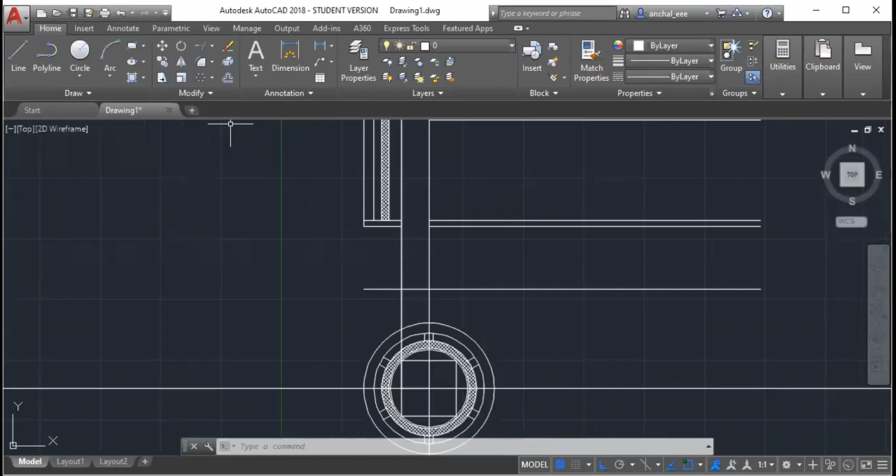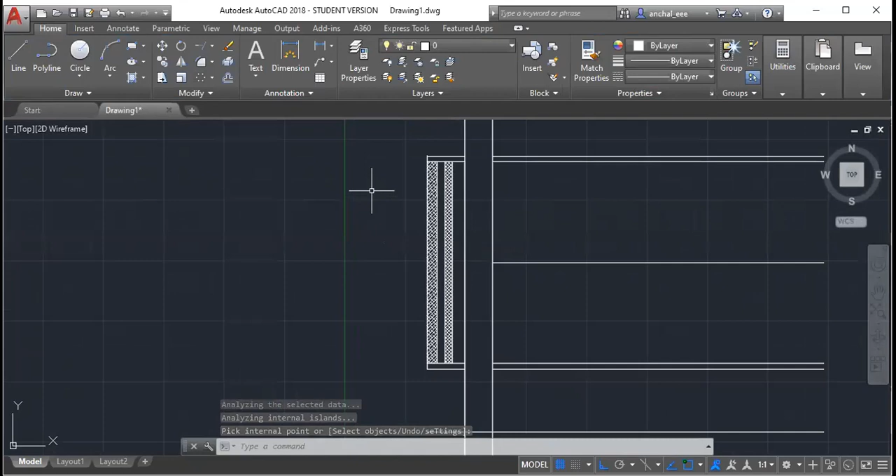Anyways, we are repeating the same thing only. We will hatch now HV winding also. I'm taking the next one. So HV winding also we will hatch it. Okay, now I will hatch the insulation also. Insulation with solid. This one, and wooden pieces.

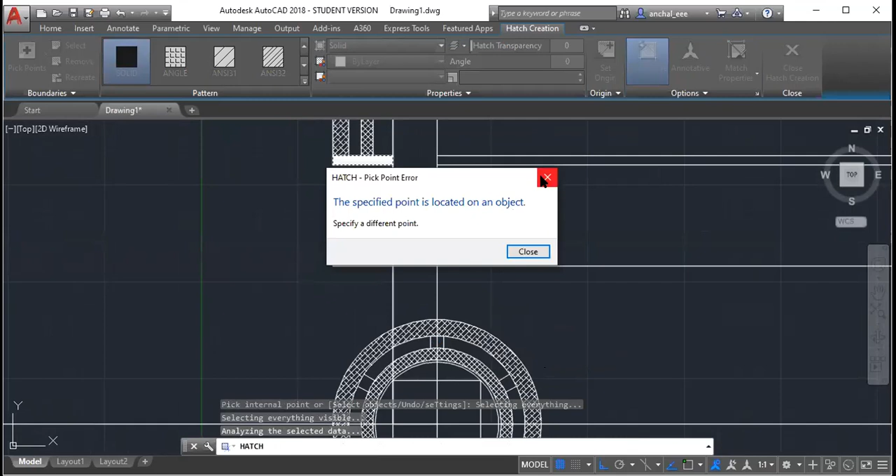Wooden pieces. For that wooden piece also, no. I think this is not. If this is not extended, then others will also not be extended. With respect to this circle right here. With respect to this circle and this.

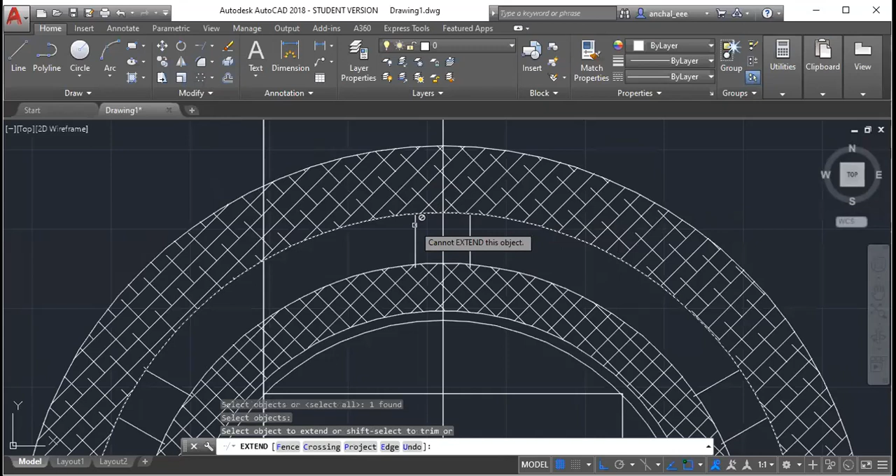I'm deleting this wooden part. I will draw it again because it's not letting me hatch it. I don't know. I will do this mistake.

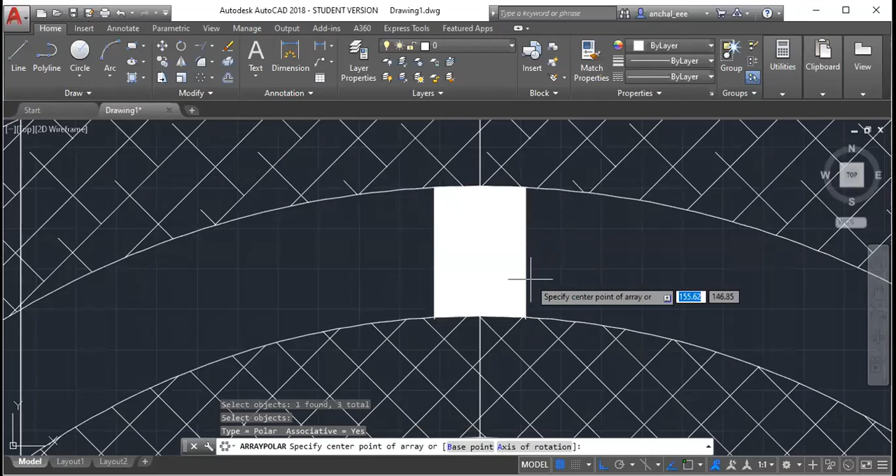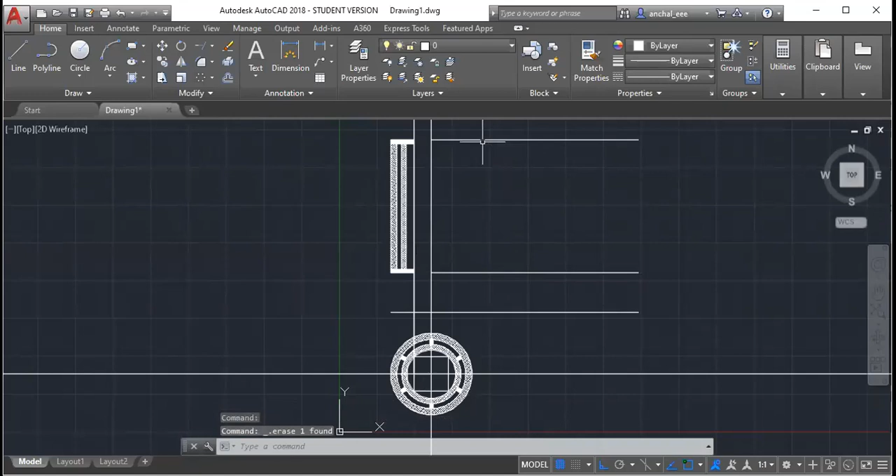So have you finished till here? Have you all finished till here? Please, you have to reply to me, otherwise I cannot keep talking on my own. Yes. Have you finished till here? People are not replying, so I will keep doing my work.

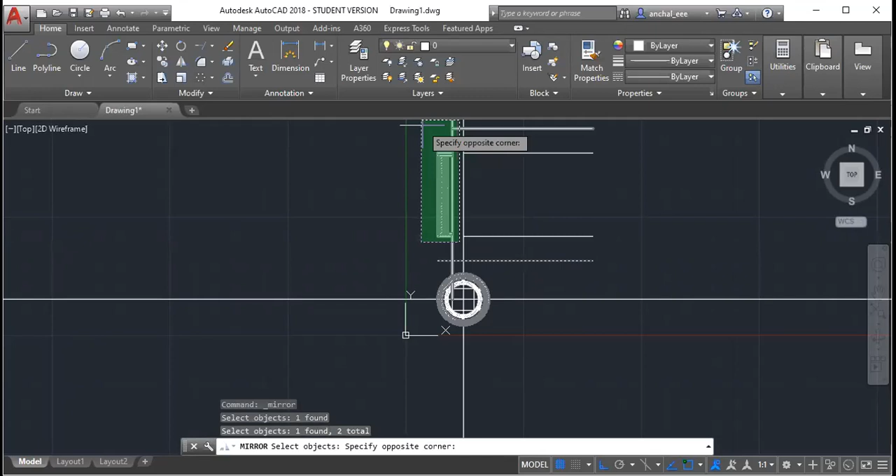So mirror. Now we will mirror it. How will we mirror it? What all do we have to mirror? We have to mirror this core, windings. Okay, and this is my mirror line from here to here. Length. So I will get a complete core here.

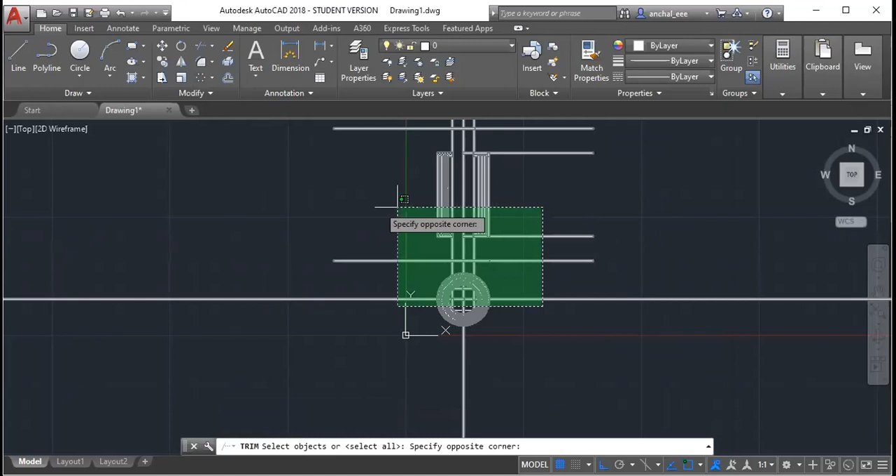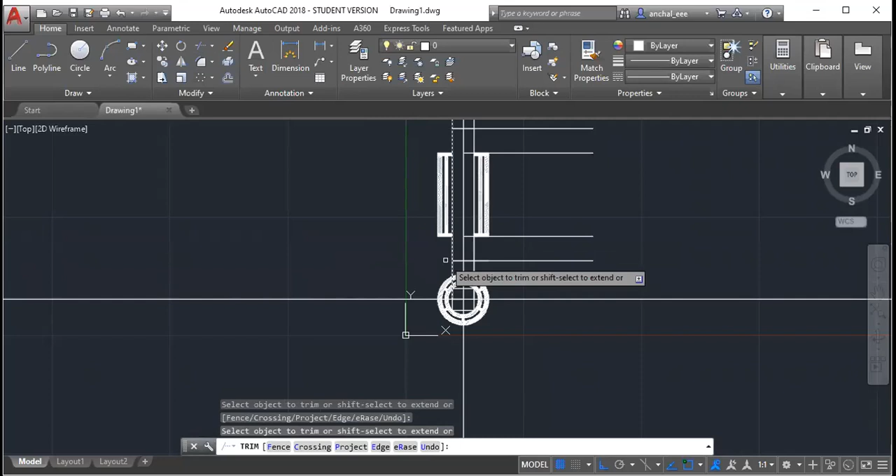Now again, now you can make the proper core. So what will you do now? You can trim it. Trim. It will take a little time for you to understand what all is required and what all is not required. Now, if you see, so we don't need this line also, and in between I don't need this line also, this line also, this line also, and okay, I will keep it. I will just delete this one. This one. Remove this. And this. Okay. Now you have drawn till here.

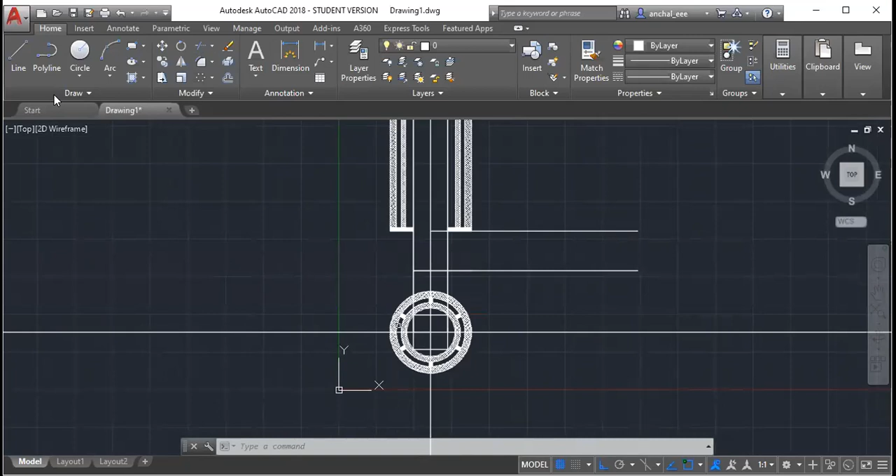Now what we are going to do is, you can see the distance between the two cores, or the two limbs, is 160 mm. So I will use copy now. For copy, select all the objects, okay, till here. I right click. Base point will be my center of the first core. From here, I have to displace it, I have to go 160.

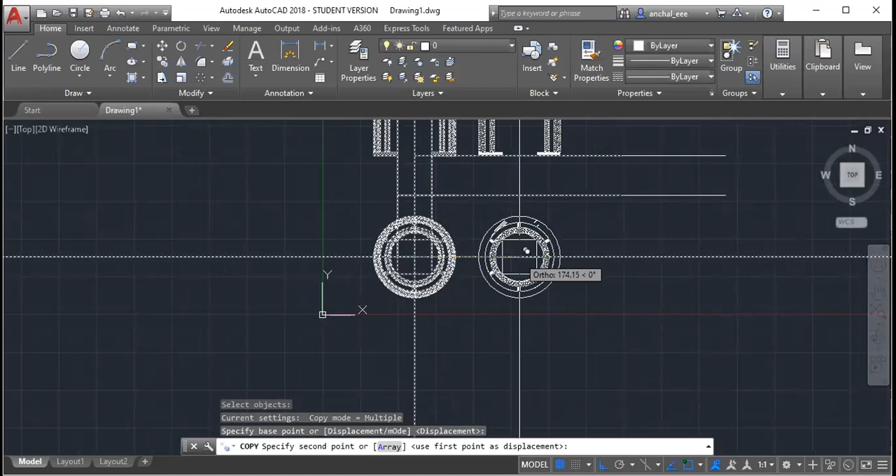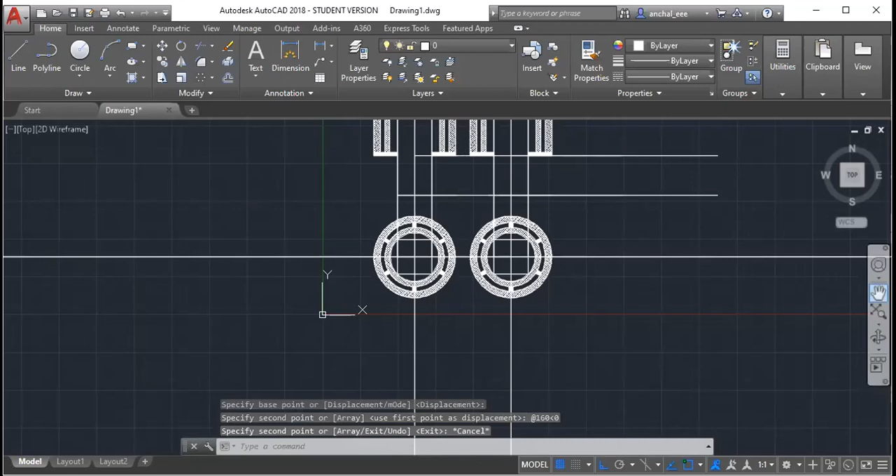See, if I am moving my cursor, then you can see it is showing 160, 1.02 like that. It is difficult for me to make it exactly 160. So I will write here @160, angle of 0 degrees, enter. So you will get the core. Are you getting it?

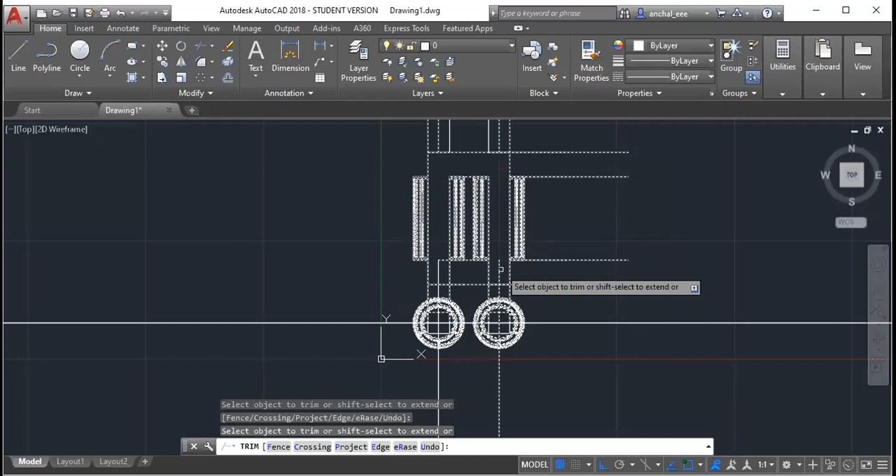Then now I will trim my transformer. My drawing is complete. I will trim it. Whatever is required, I will keep it. Rest all I will delete. So I don't need this now. Just make a core first so that you are not confused. Okay. Now I don't need this line. This line. Okay, this can be deleted. This line. Then this line. This line.

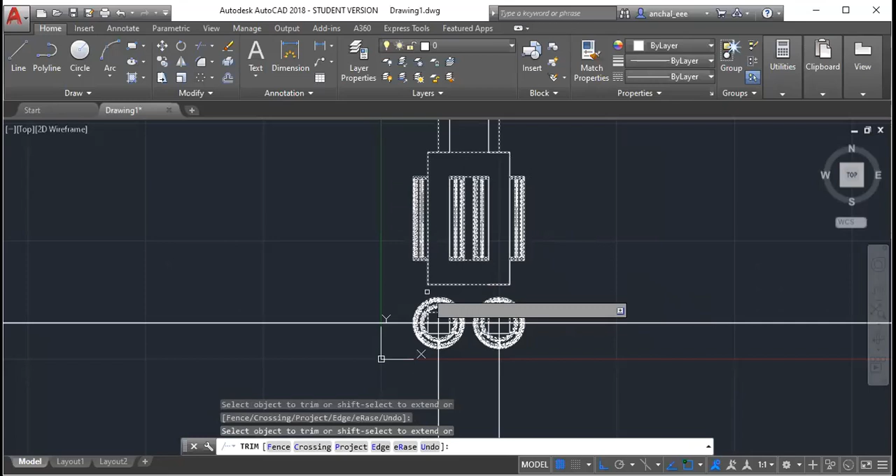Why has it come double? Because we have done the mirroring, so that line has become double. That is okay, not a problem. Whatever you can trim, you can trim. Now escape, select the extra lines to delete. I don't need the construction lines now also, I'll delete.

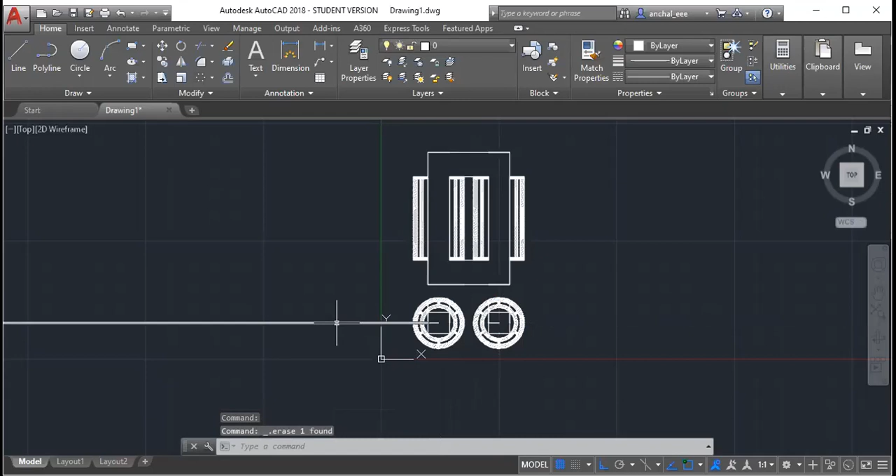One more thing, sorry, I forgot to hatch the core. So we will hatch the core now with standard hatching. This one, let us see whether it comes. See, it is coming diagonal, but when you cut the core from the top and you see, it should be with horizontal lines. So we will have to change the angle. I think 135 will work for it.

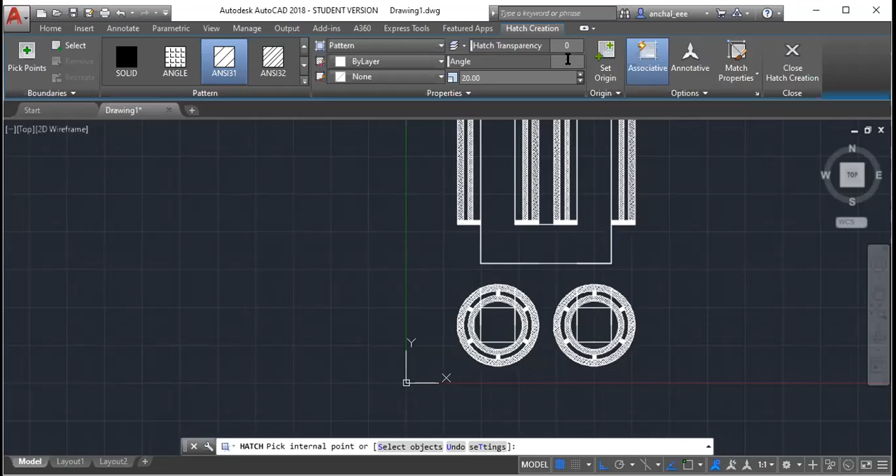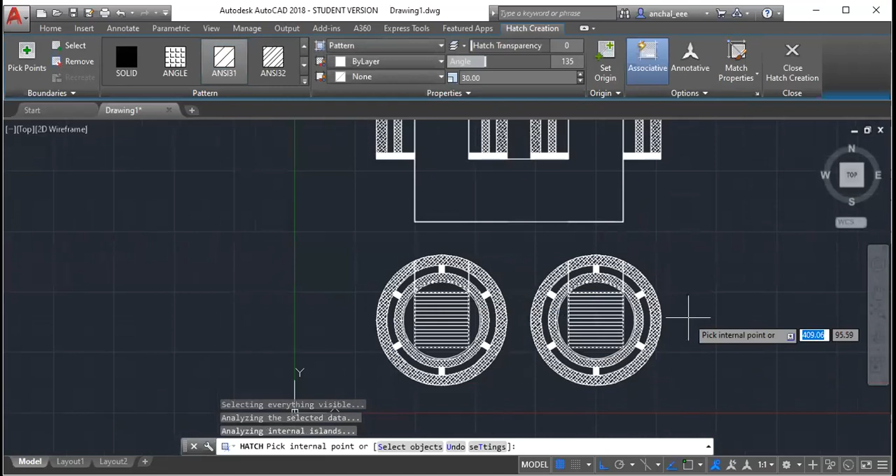Yeah. So you can see this scaling is too much. So we will increase the scaling also. I'll make it 30 and see. Okay. Let it be 30. It has gone up also, no? Because we have not deleted this one.

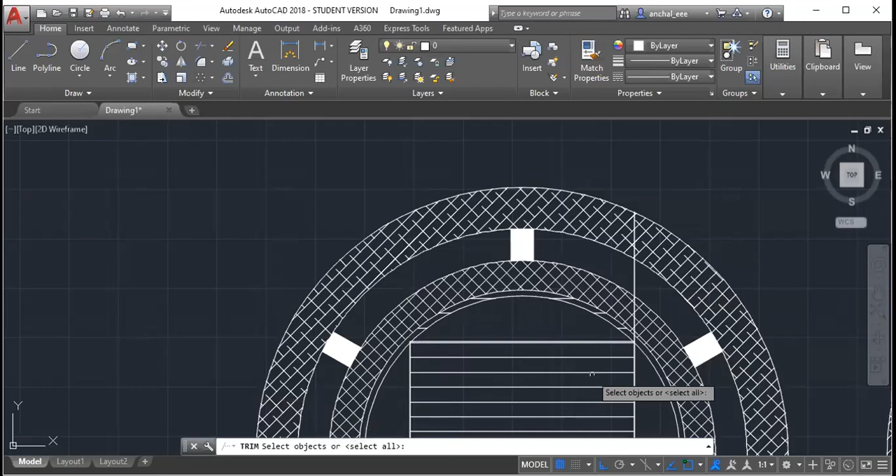So we will do trimming with respect to this line, we will remove this line, and as well, okay, trim with respect to the upper line, remove this line. Is anybody having a doubt here? We are almost done with it. Yes, please. It will be good if you tell me now.

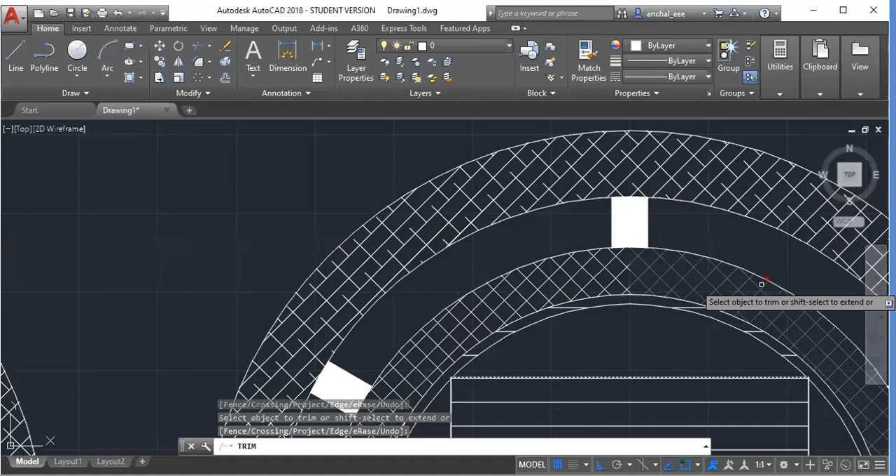Yes, we are left with a very small part, and you will be able to see the core here also when you are cutting it, right? So what will you do now? You will extend it from here to here. When you cut the core from the top and see the upper part of it, you will be able to see from here to here also. We extend from here, this is this one, from here to.

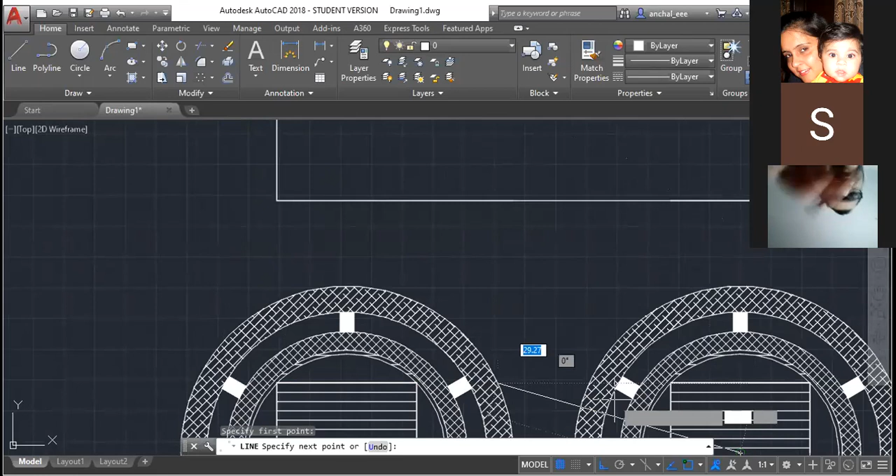Yes, Dawood. Yes, Dawood. Yes, ma'am. Why have you turned on your video? By mistake. Okay, I thought you had some doubt. My laptop now keeps hanging in between.

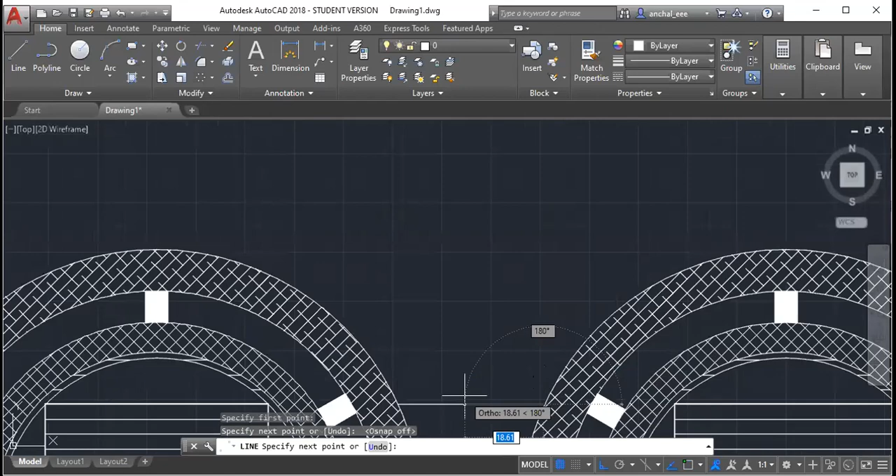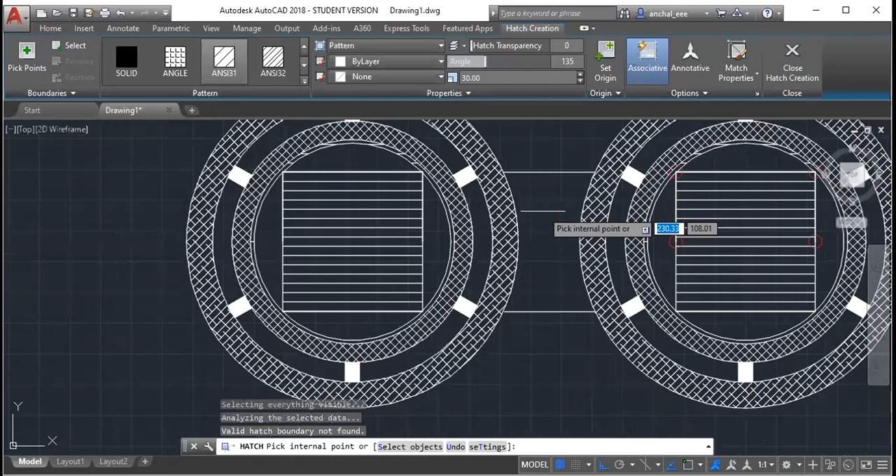Okay, so you have to draw the core here also. I draw on this object here and I am taking the point from here to here. You have to be very careful while drawing it. Okay, now do the hatching inside also. Not a closed boundary. It is closed. With respect to this. Why I have extended here. Yeah, please try it. Okay. After doing this, you hatch it. That's it.

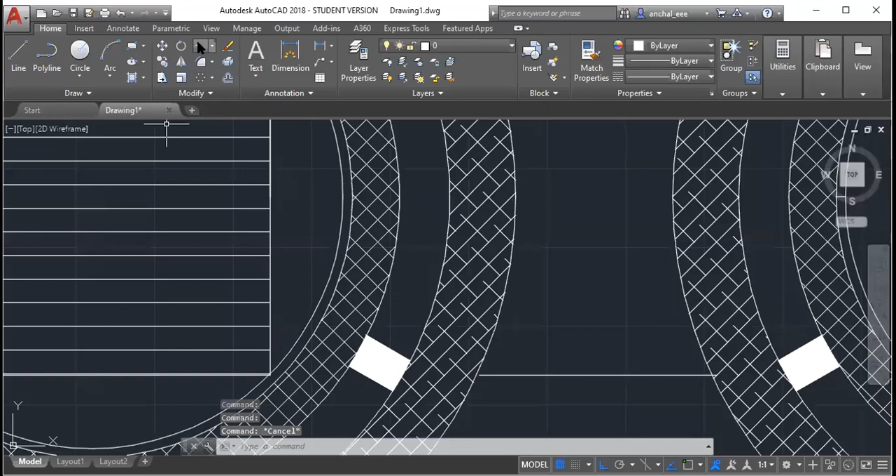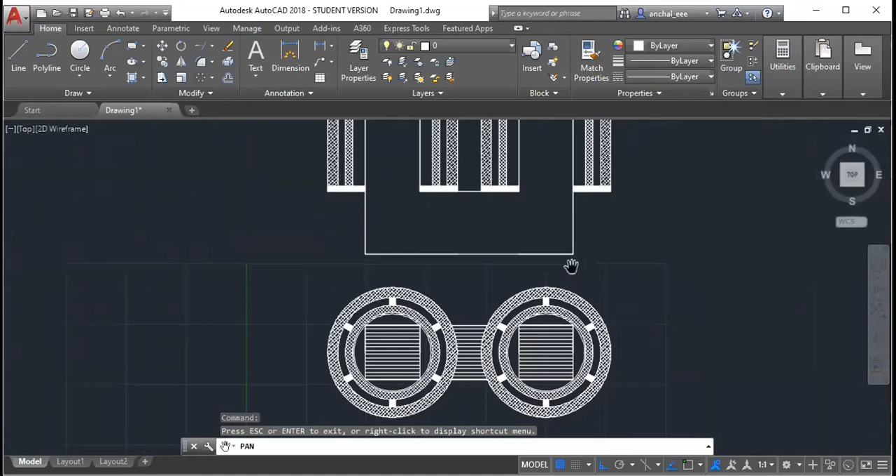Nothing much is left here. So it is done. Is it clear? Please say yes or no. Yes, ma'am. Yeah, now you have to draw the side view also. So how will you draw the side view? Side view is what will be visible when you see the transformer from this side, from here to here, looking from your right hand side.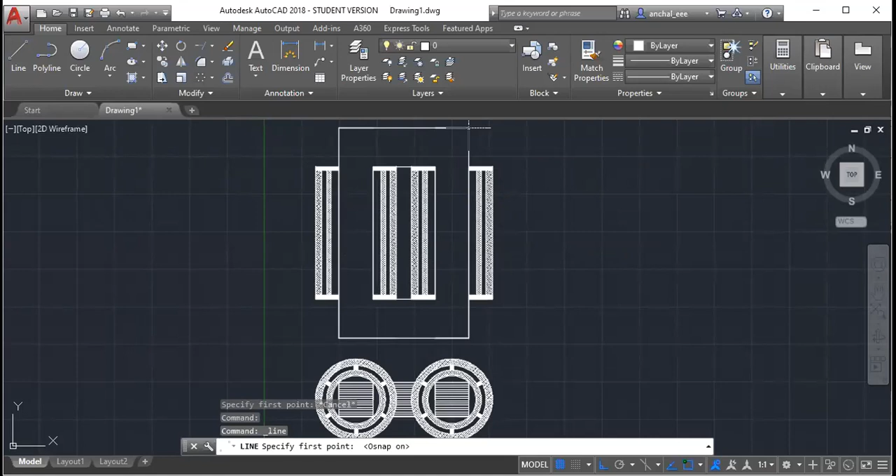You will see the core upside and downside, and that core is bound with the winding. And which winding will be visible? HV winding. Right. So what we will do? We will draw one line. We will just extend it so that we can get the height of it. Okay. And from here also. Okay. And then I am drawing one vertical line also from here to here.

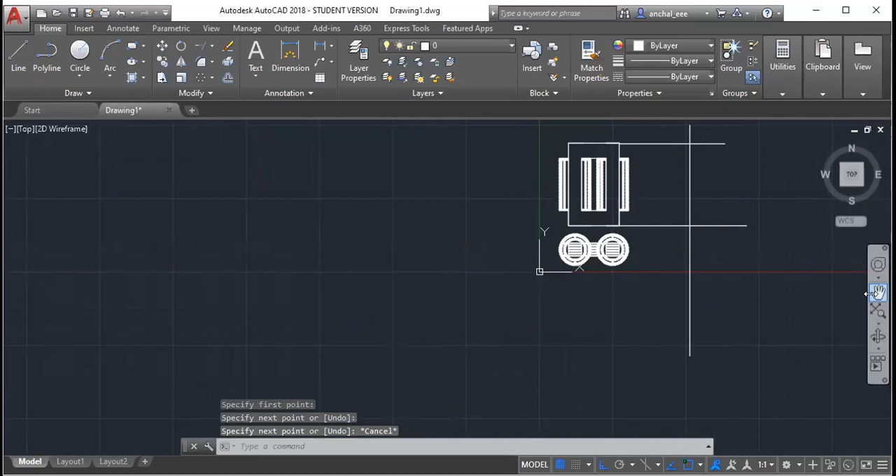Now exit it. Now you know that the width of the core actually is not given to you, but we have taken it as 56.8, that is 28.4. So I will take the offset of 28.4 only, and I will draw it here to here. Fine. Then winding width is not given to us. So approximately I will take something. Suppose I will take it as some 100, enter. From this center line, go this side 100, go this side 100.

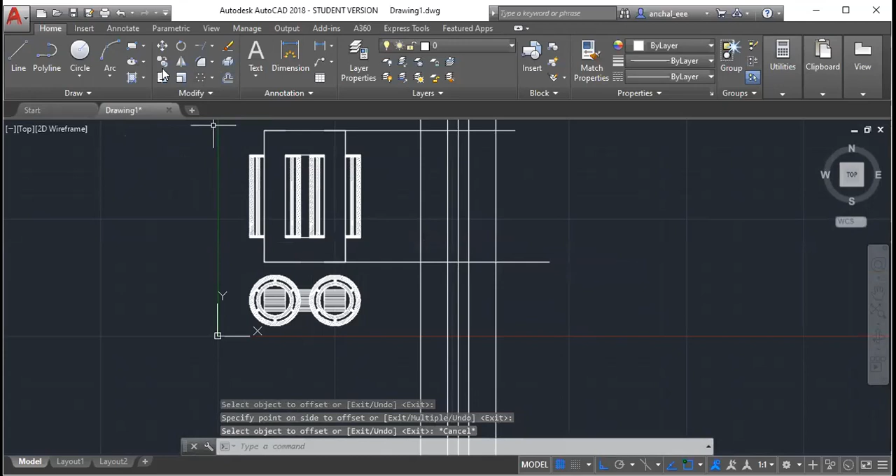Okay, and now see the insulation is here, winding is here. So from winding, I will draw a line. Again, from winding, I'll draw a line.

Now again we will do, who is talking? Please, if you are talking with your family members, keep yourself on mute. Yes, please. If you are talking to your family members, keep yourself on mute.

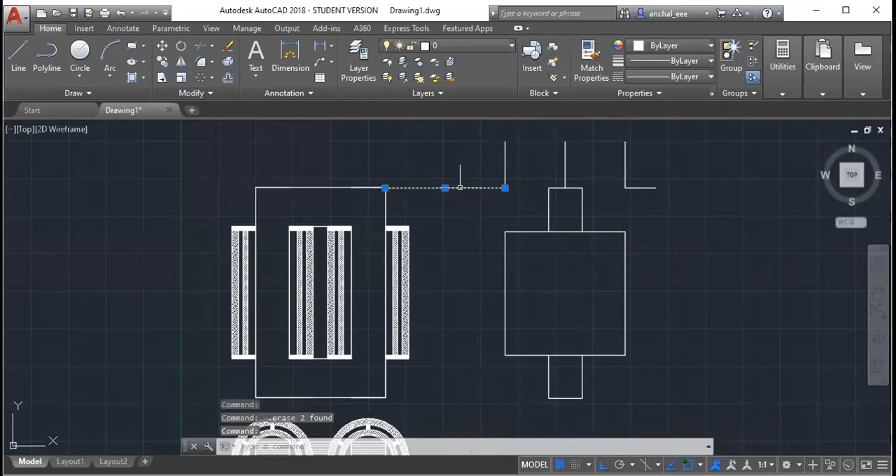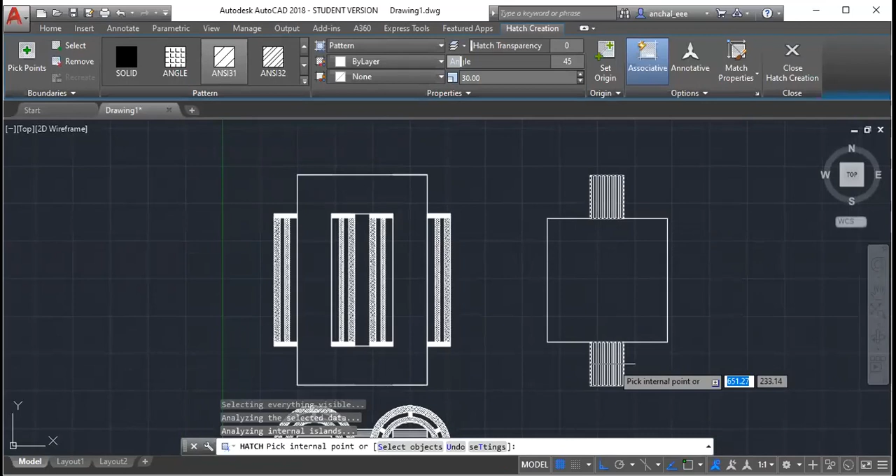So this is the side view of your core of the transformer. Now the core we have hatched with normal hatching. So 135 we took for horizontal lines. For vertical lines, I think 45 will work. Let us see. Yeah. So from the side, the core will be visible like this. Alright. And outside, I will be able to see only the HV winding, because it is wrapped with HV winding. I think I have used this one for HV winding. I will put that. That's it.

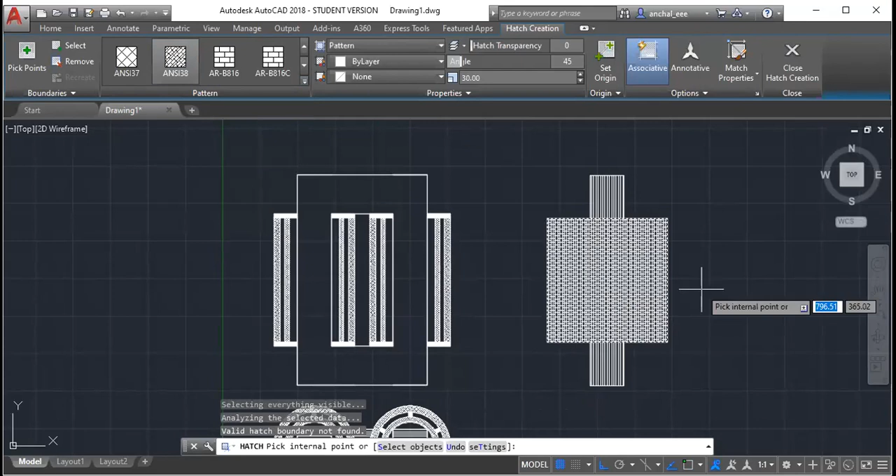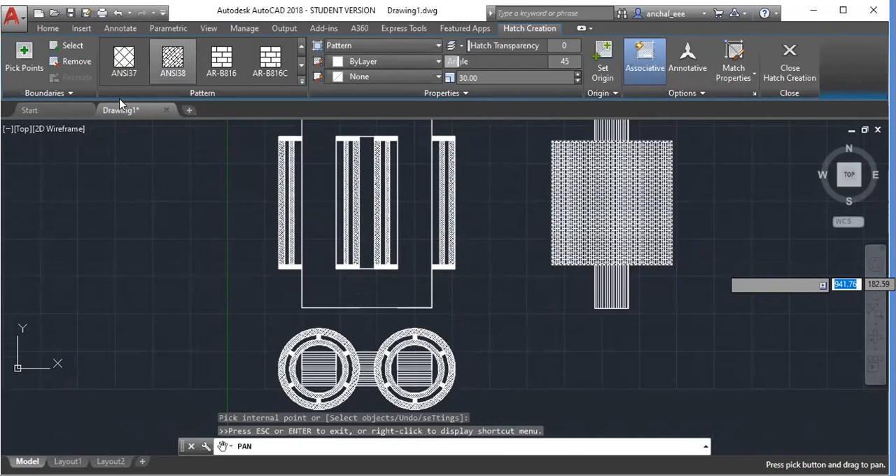Anybody having any doubt here? The width of the winding is not given to you, so you can take anything. So this is the end of your question number 2. We have drawn everything. I hope you all know how to give the dimensions. Please tell me, otherwise I will tell. Yes. Please tell whether you know how to give the dimensions or not. No, ma'am. Can you please tell?

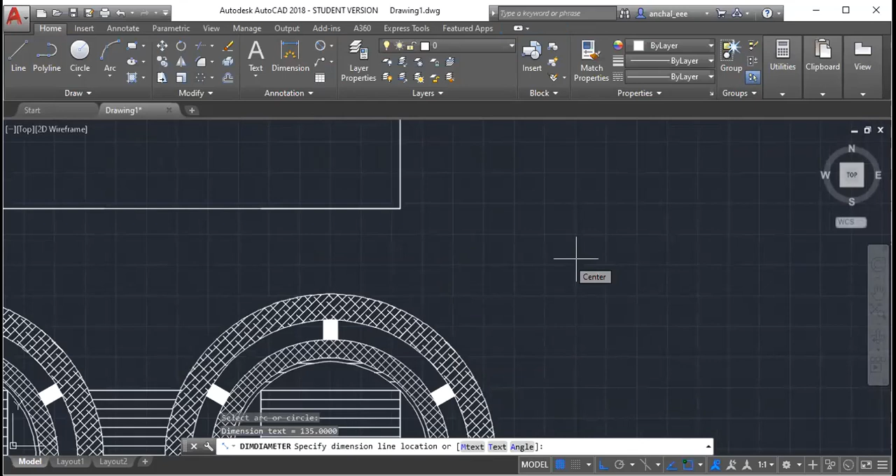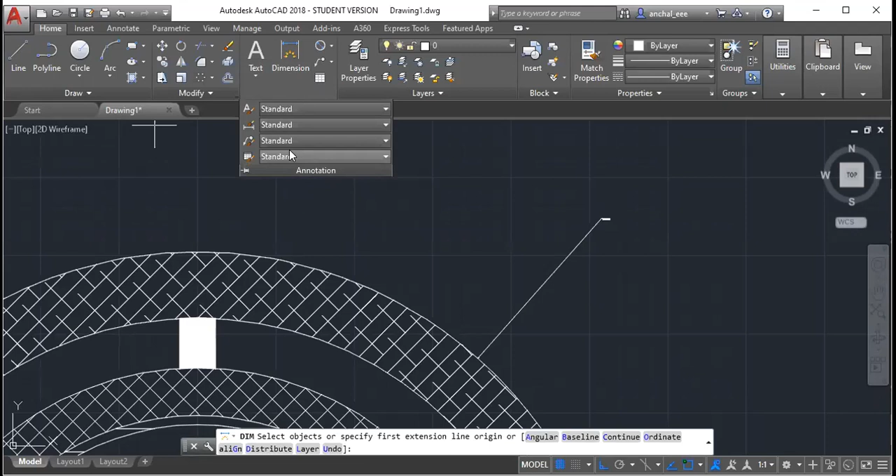Go to the dimension. So firstly, we will give the radius and diameter of the circle. So from here, I have selected the diameter. Now click on the circle and pull it out. Pull it out. Okay. But you can see you are not able to see the dimension. So what will we do? How to go to modify? Yeah. Inspect. Here, one minute.

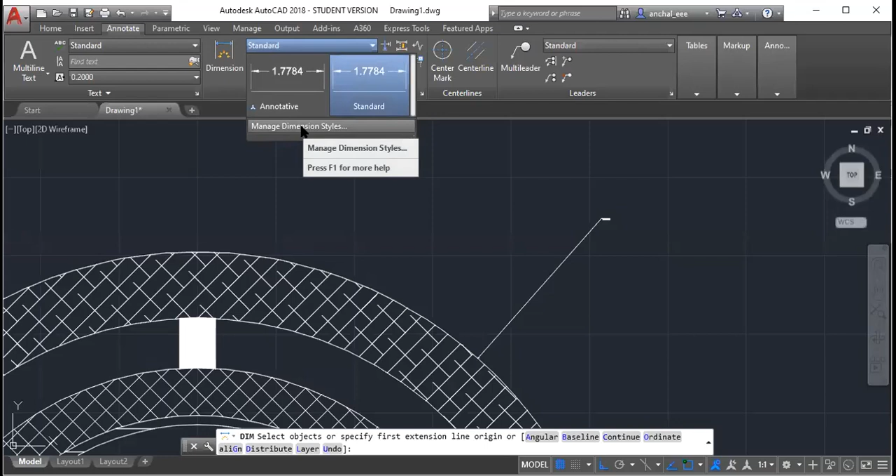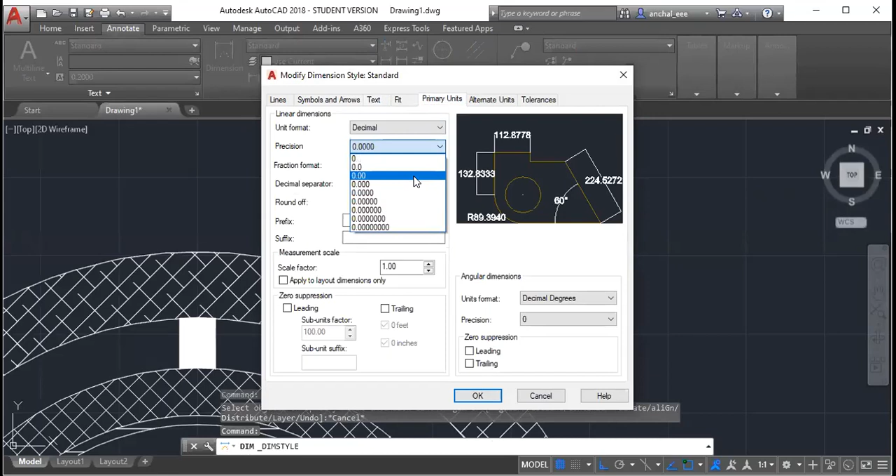Go to standard, then manage dimension style, then modify. In modify, go to text and increase the text height. Suppose I make it 10... let's try 20 and see what it looks like. Then go to primary units and set the precision to 2 decimal places. That's enough. Symbols and arrows are also there, give 20. Say okay, close.

Can you see? We are getting it. Yes or no, ma'am? Now I think this 20 is too much.

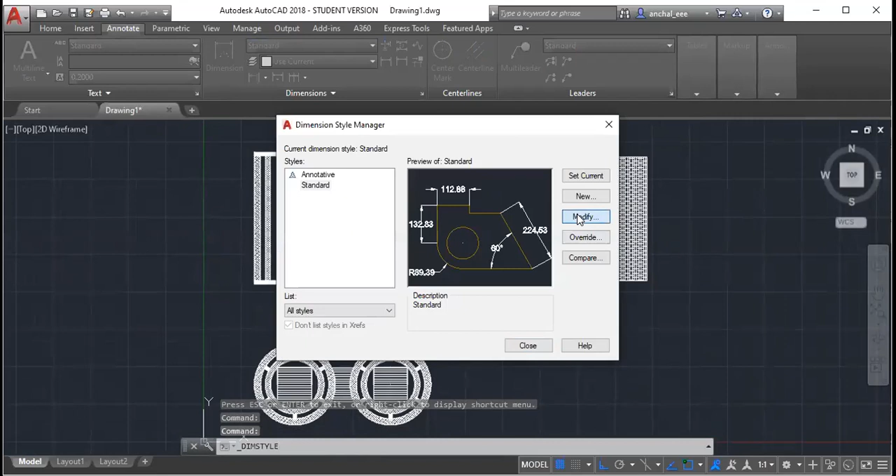So again I'll go to modify, go into text, and make it 10 only. Symbol and arrow also I will make 10. Say okay, close. So it's fine. According to the diagram also, it's looking nice. Anybody having doubt in this?

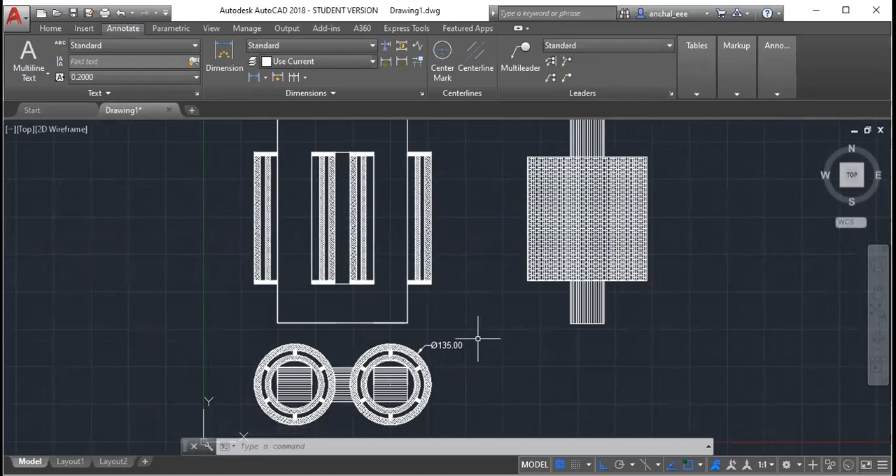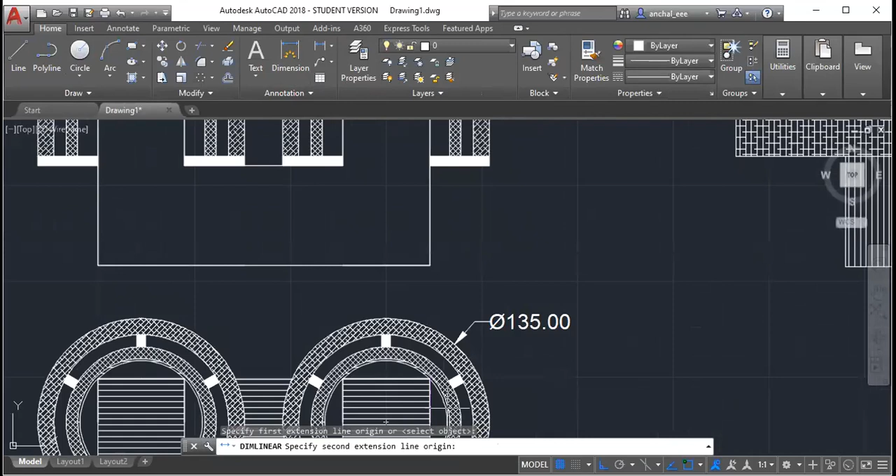So we will see the core. Go to home, then dimension, and select linear dimension. From here, linear dimension we select and go from this corner to this corner and pull it. So it is 56.8, that is what we have there. Correct?

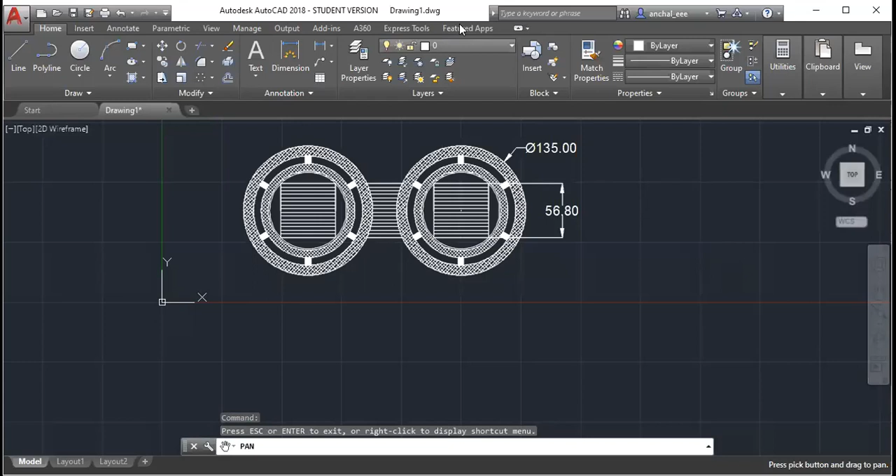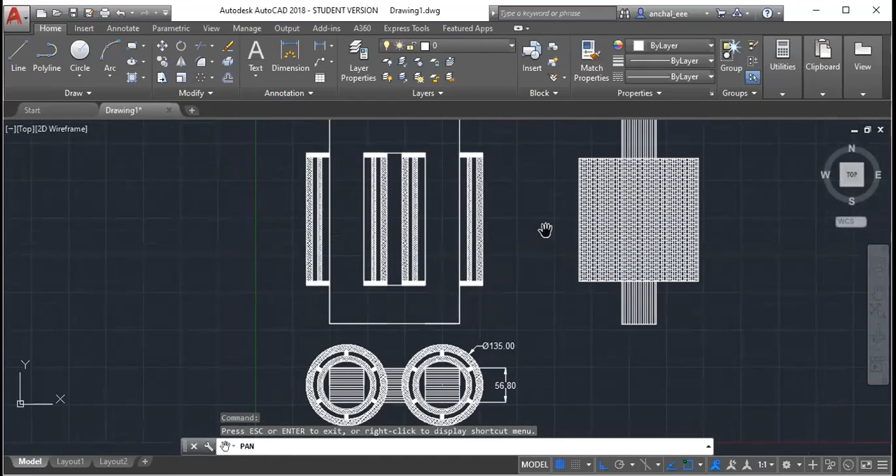I hope it is clear to you. Anybody having doubt here? So like this you can mark all the dimensions. Yes, please reply to me. Any doubt anybody is having?

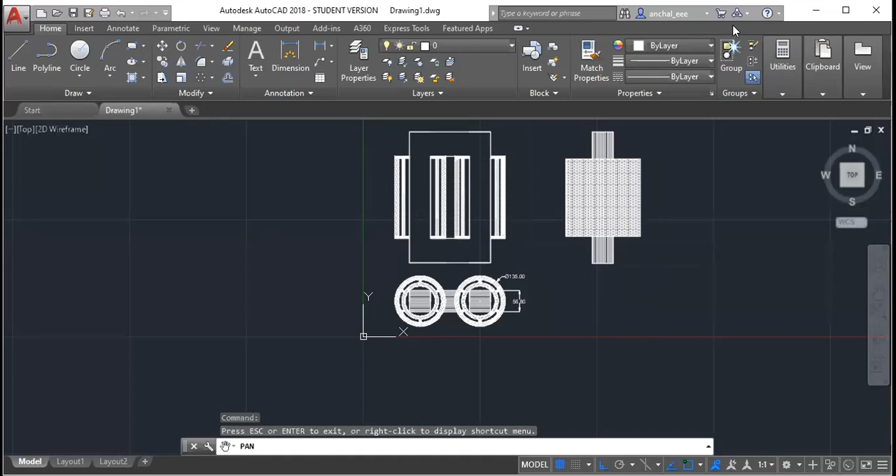Yes, anyone having any doubt? Kindly unmute yourself so that I can listen to you. Yes, please. Dimension part, dimension part, you didn't get it? You want me to do more dimensions? Okay, so suppose I want to do the dimension for this core, that circle.

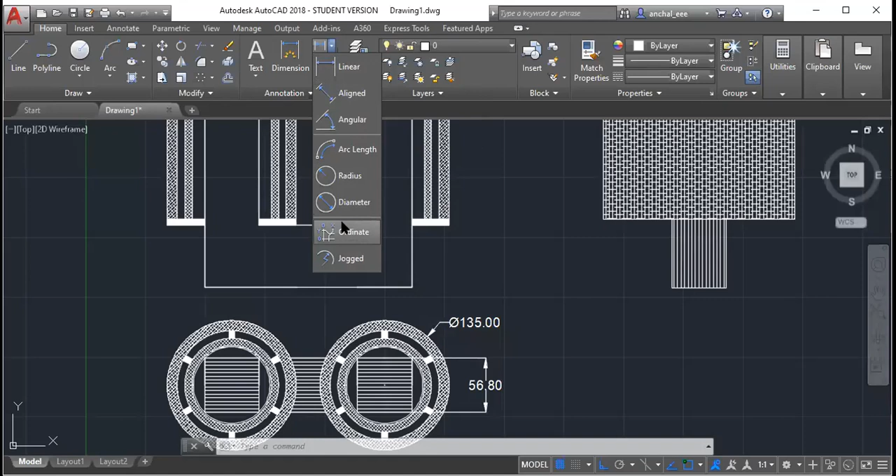I'll go in this annotation. Can you see that annotation? There, on the rightmost, topmost right icon, you can select linear dimension, aligned, angular, arc length, radius, diameter. What was given to me in the question was diameter, so I will select diameter. I'll click on the circle whose diameter I want to measure, pull it out and leave it. Click it, okay, so you will get the diameter.

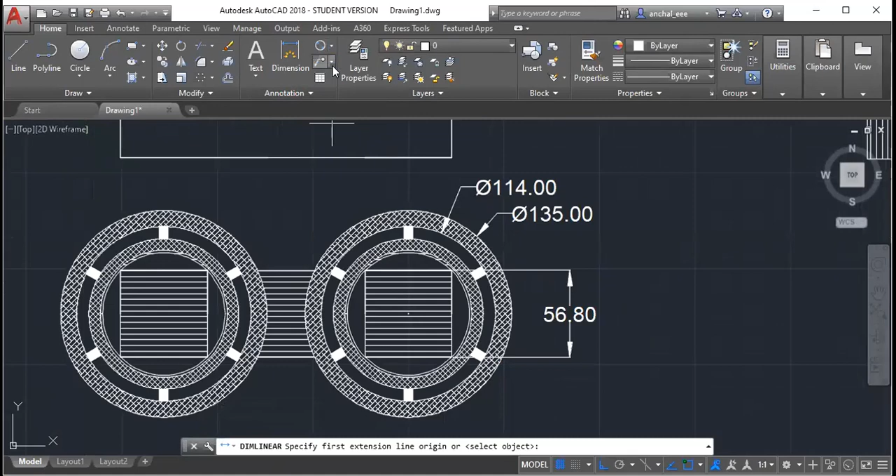Similarly, for linear dimension, go to that same icon, select linear. Suppose I want to do from here to here, from here to here, pull it out. Oh, let us take half only so that we should know. We have taken it to give you proper dimension.

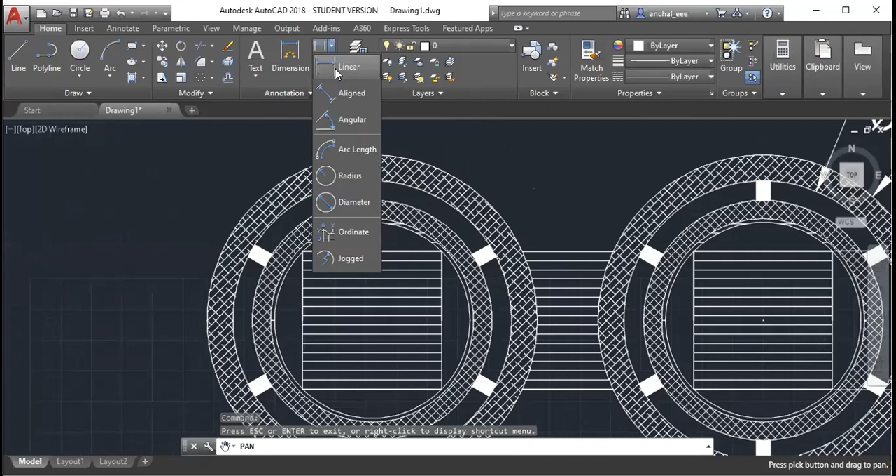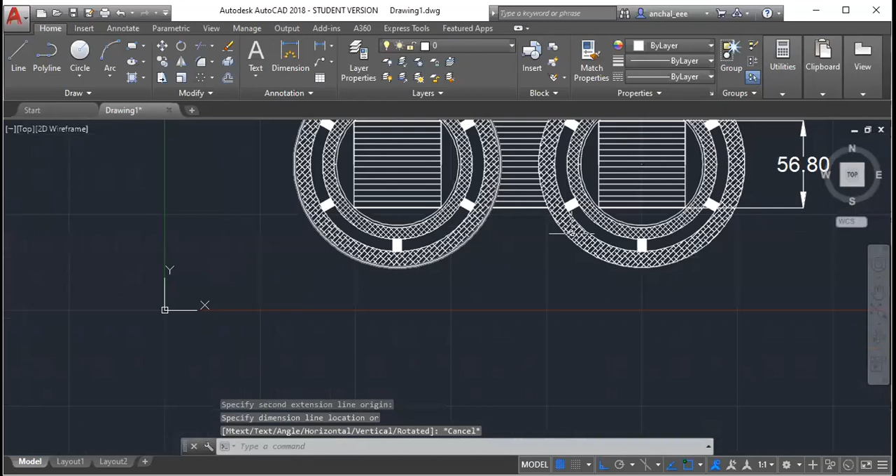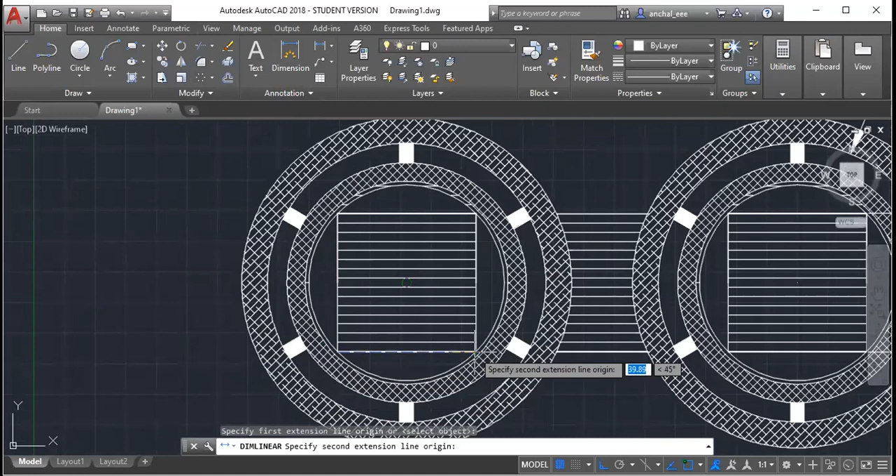So here a dimension from upper point to the lower point. Why is it not... okay. Again and again taking the center point on it. You will do it. So 57.9 it has come, but we have taken it as 56.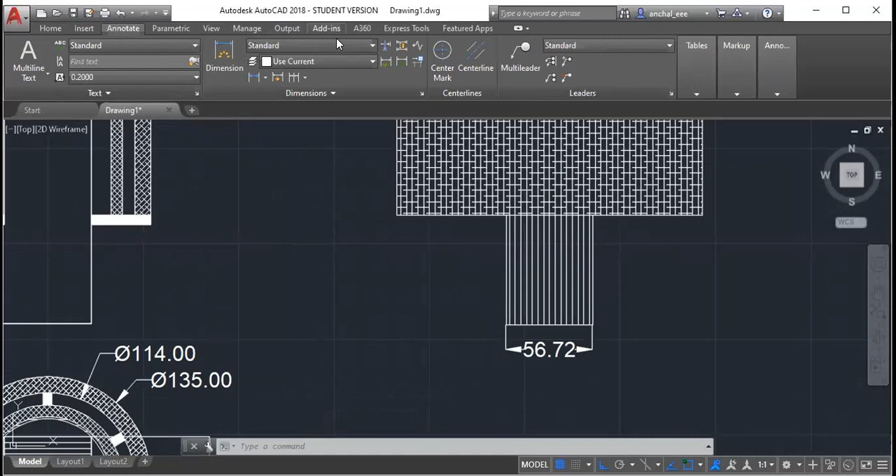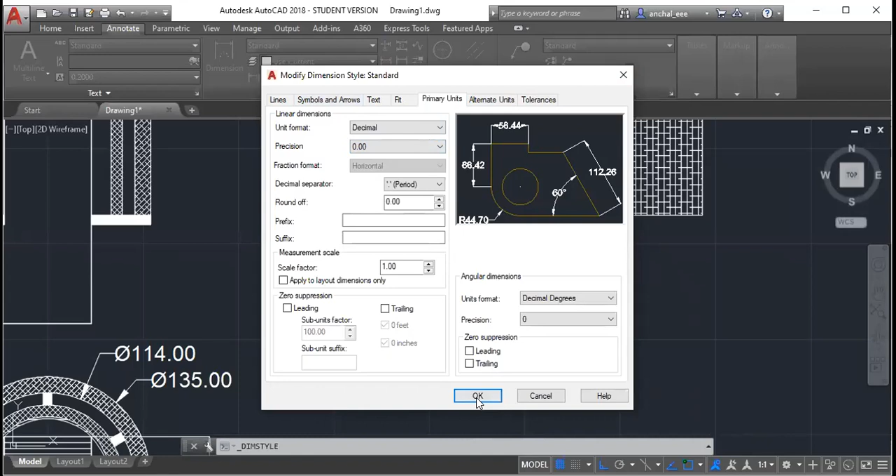And to adjust the settings of dimensions, you have to go to annotate, and there in standard, go to manage dimension style. In dimension style, go to modify. In modify, you will set the symbols and arrows size, text size, and primary units. In primary units also, you will just set the precision to 2 decimal places, that's it, nothing else. And then after setting all that, click OK, close the modify toolbar and you will get it.

Yes, anything else? Yes, please, anything else? Yes, kindly unmute and tell anything else, otherwise we will close the class. No ma'am, fine, so can we close?